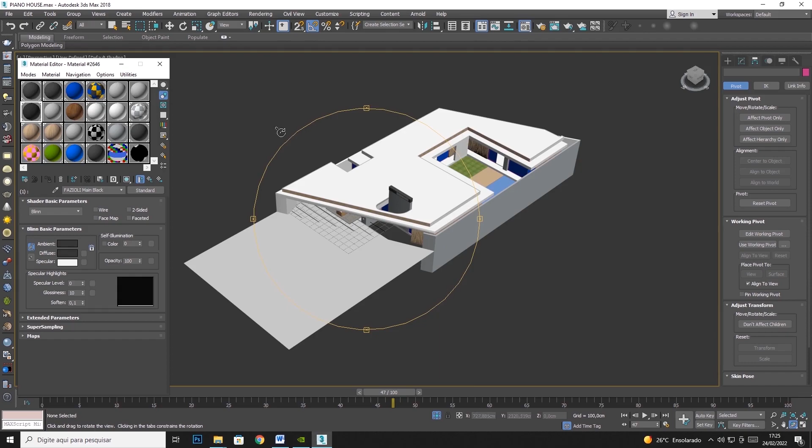Let's talk now about the exportation of the files. I left here the final version of this file in Max.

Look, you can click on the link right below this video because it is already the Max version. It is already correct, the mapping and everything, the objects. The pivots were corrected, so don't worry about it. The materials are already replaced, transformed into standard. I'm gonna leave it here so that you can download it and follow this class with me, or if you just want to follow along with your own file, that's okay. But if you want, just click right below here and download the files.

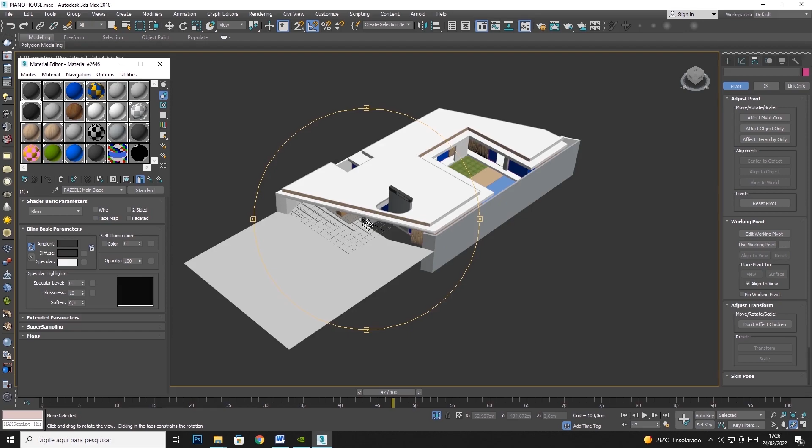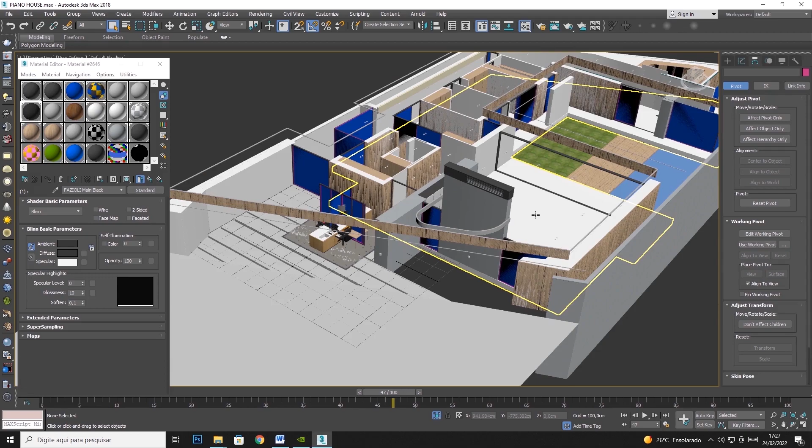So let's go. What did I do between the last class and this class? I just verified the mapping of all the objects, checked if it was correct, if the direction was correct. Everything's correct now. Another thing I did was replace the materials that were Corona and V-Ray into standard. If you select the piano material, everything here is in standard. This black, all of this, all of them are in standard. All of it was replaced, for all objects, so it's gonna be easier to work with this.

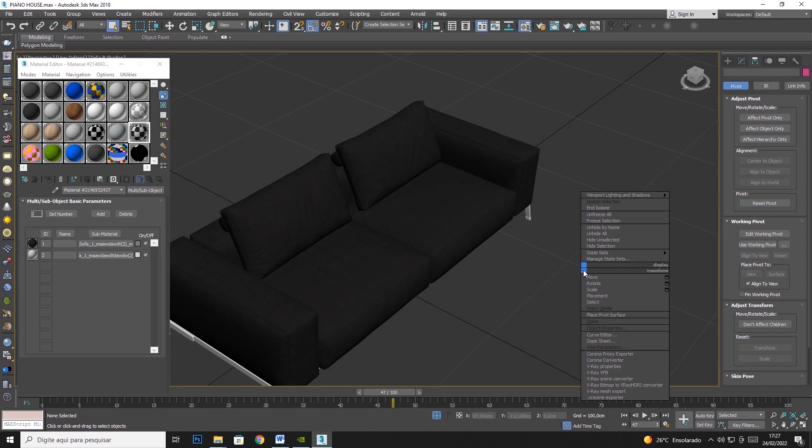Look, standard as well. So yeah, everything is in standard. And also the pivots were corrected, based on that criteria that we talked about.

For example, if I want to move it in Unreal, I'll leave the object aligned to the 0 of the world. But if I don't want to move the objects, like walls, ceiling, floor, I'll leave it as it is.

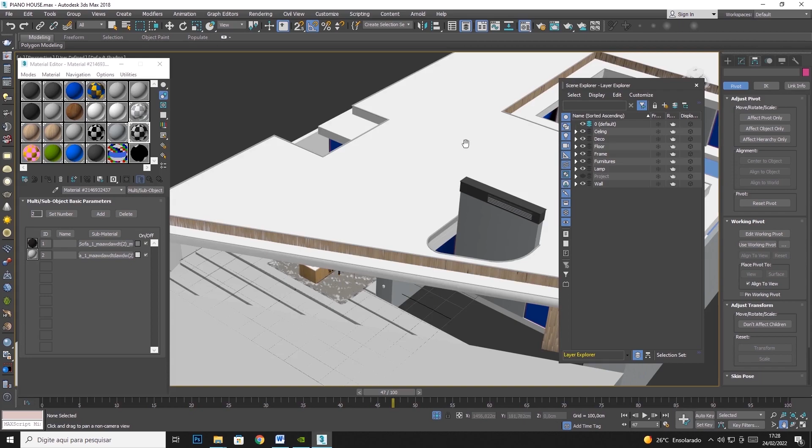Let's see the layer explorer. Here we have the ceiling that is aligned to the pivot where it was, I didn't want to change the pivot positioning. The decorations, we'll talk about soon. Let me check the floor, it's already adjusted in the position it was, at the 0 of the world.

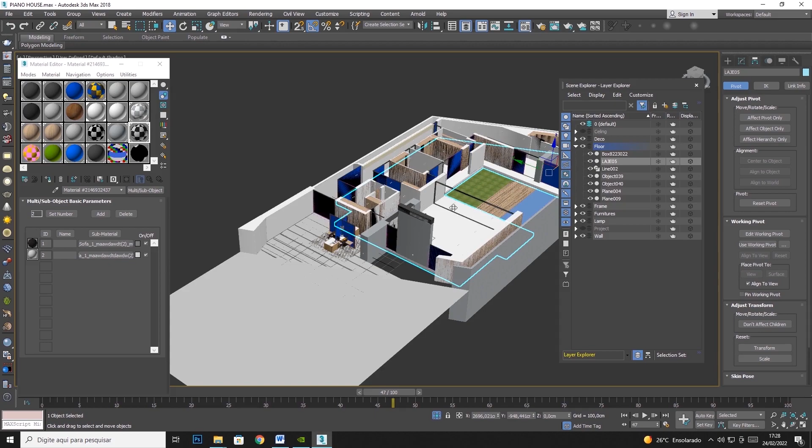And I'm not going to adjust the floor because I'm not going to move it. The frames I'm going to keep, the furniture, this. Let me take the furniture and leave just the frames.

What I did with the frames specifically: these frames are basically frame and glass. However, some of these glasses are sliding glasses, going to the left and to the right. Some doors open and close. On Unreal, these objects can be interactive — for example, as the character approaches, the door will open, and as he moves away, the door closes. We can create that interactivity there.

For that, I made some windows where I want to open and close the door to release the access for navigation. I'm going to move these doors. For example, this door here is for this area, the living room, the main living room. Let me get the wall here so you can see, it's one of the main living rooms.

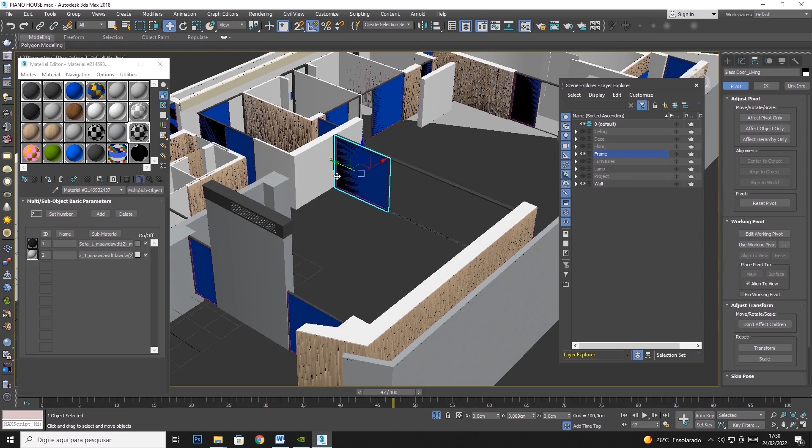So during the navigation, my character comes here and the door is going to slide like this, then it's going to slide like that. For me to do that with the pivot distant, it would be really hard to adjust the position of the door to create the animation. So what I did was put the door's pivot at 0, I left it in the center of this. There in Unreal, I can put the door in the right position and animate it — it's going to be much easier.

Same thing here, this door is from a room, for example this room here. Same thing, when I approach this door, it's going to slide.

A little bit different here with these two doors. I'm going to explain why. If you notice, the zero of the world is here. This door, I don't want it to move to open on the other side.

I want this to open on the pivot, like if it was a door like that. But Unreal considers the pivot of the world, not a pivot on the object. So if I want the pivot to be positioned at the end of the door, I will not put the door in the center, because the pivot will be in the center. So I put it right here at the end of the door.

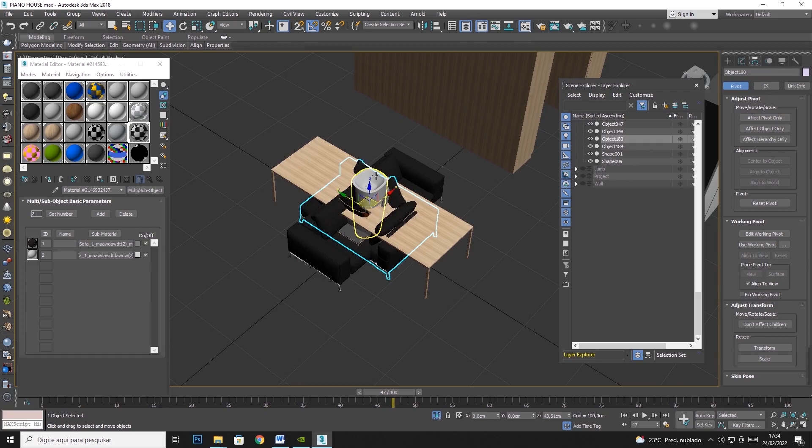The sink as well — if I want to use it in some other project, it's okay. The chair as well, remember we had 6 chairs, so I just left one here because I can copy it on Unreal instead of adjusting 4 positions.

Okay, so let's do this. What else do we have? The table as well, the couch, yeah, the bathtub, this one. One of the armchairs — we have 2 armchairs actually, let's delete one. What else do we have?

Let me see, what is this? Okay, also we're going to move that on Unreal. Let me see, okay, we can save it. And this one as well. So if I want to move this chair on Unreal, the pivot is in the center, so it's okay.

Let's see about the little armchair, the little arm. We can just do this here, okay, let's select the polygon. Oh, it's already selected. Cool, but we have more things selected, so let's select these two. I think we have one more little screw. Let me save it.

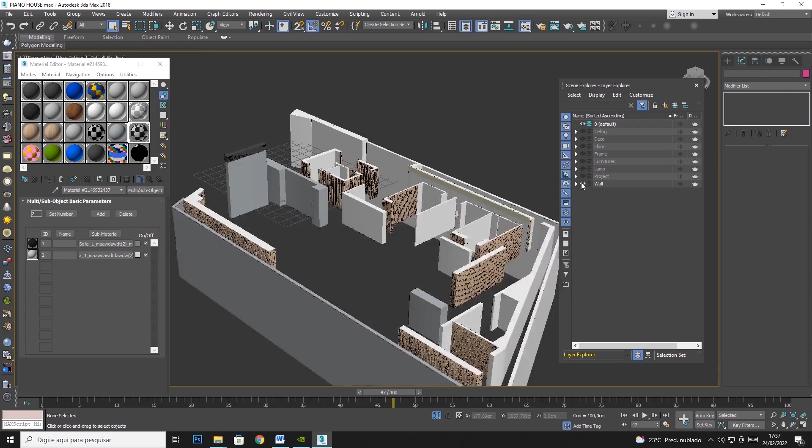Cool, now everything is just one object. So all the furnitures were corrected, the pivot okay, the lamps as well. The walls I kept the same way because I'm not gonna move them, and the project we don't need to send it. Okay nice, so we have all the pivots corrected.

Our project is ready to be exported to Unreal. Let's save this, because this file here is going to be available for you to download.

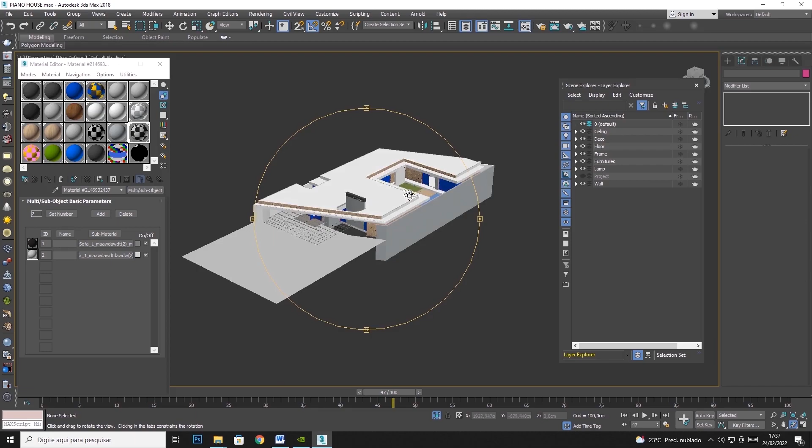So how can we export this file and send it to Unreal? It's very simple, you just export it in FBX. But instead of exporting all the project, let's export this in a segmented way because it's going to make it easier, and we can work in an organized way this way.

Let's get started, exporting this ceiling. Select the elements, export, and that's it. Look, I created a folder here, FBX folder. Remember the pivot text here? I'm going to delete them so that we can get started again. Now we don't need them, let's delete them.

I'm also going to delete this folder here. So there is no folder anymore, but we're going to export all the files together in FBX. I'm going to leave these files in FBX so you can download them. You can click on the link below, and that's it. In case you have some problem in your FBX file or exportation in Max, or some compatibility problems, you can go straight to the FBX files that I'll leave for you here so you won't have problems.

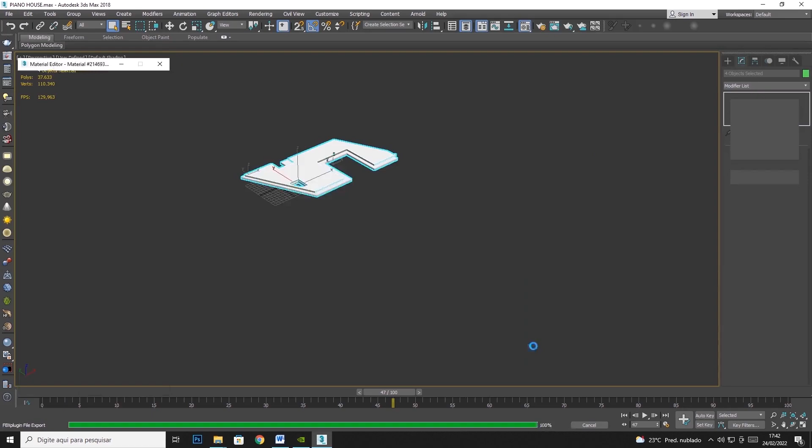But don't worry, we're going to do it now and I'll explain. Export, let's create a folder, let's call it like this: SM underline deco underline. Including, Unreal doesn't understand space, so if you're going to type some name, use underline because Unreal doesn't understand space. Put this underline instead of space, and that's okay.

And it also fits in static mesh and materials and other things—always name with underline instead of space. Cool, let's save it.

Here, important: go to preset geometry, it's going to export this, leave it marked, because if you have a very cracked mesh with little segments, it will give a smooth to the mesh. If the model has turbo smooth, it will export the turbo smooth from the mesh, and it will preserve the edge orientation. As we don't have an animation, you can leave it like this.

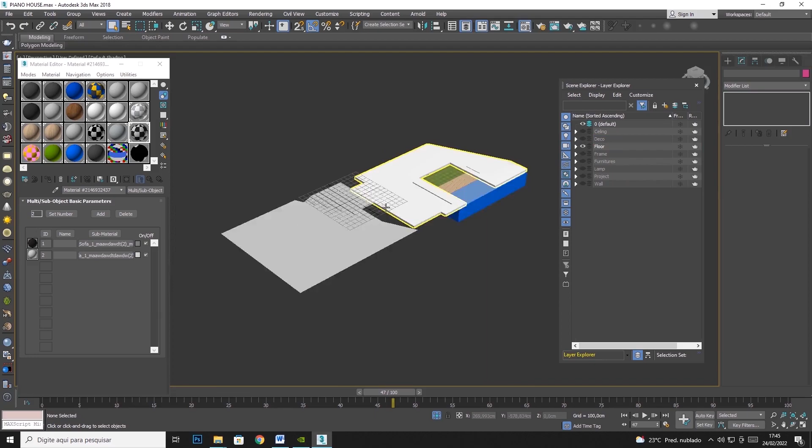Cool, so the deco is done. Let's check the floor. Select everything, file export.

Let's create a folder right here. Static mesh, SM underline floor underline. Okay, great, we can minimize it. Verify this and okay.

Next, the frames. Let's select export. Okay, folder, frames. SM static mesh underline frame underline. Okay.

Okay, let's see, next. The furnitures, export, select furnitures, static mesh underline furniture underline. Okay, great, it's marked, okay, that's it. We are exporting, yeah, cool.

You also can export the whole project, but it's not really interesting, because if the project is really heavy, a really huge project with a lot of elements, you can have some problems on Unreal and it gets closed. So it's better if we do it like this, segmented. It's more organized.